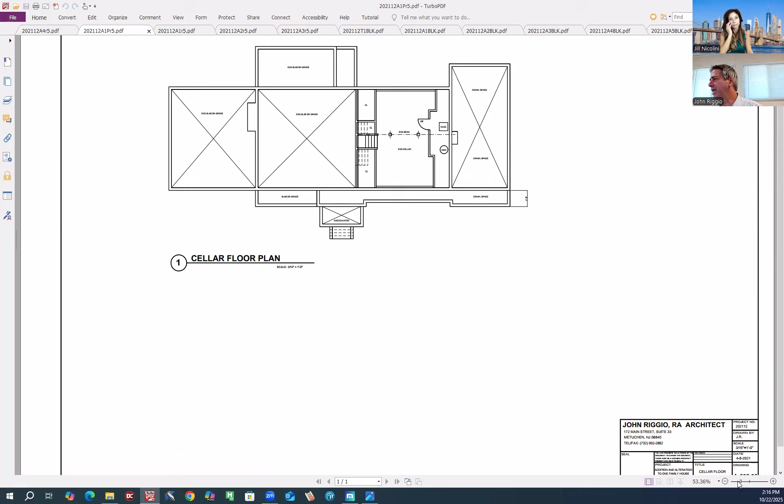This was design number five going through the process. I already sat down with the client multiple times and we adjusted the plan a number of times. A lot of times on these jobs, the house gets larger and larger instead of smaller - some people like the ideas I give them and want to expand further into a larger job.

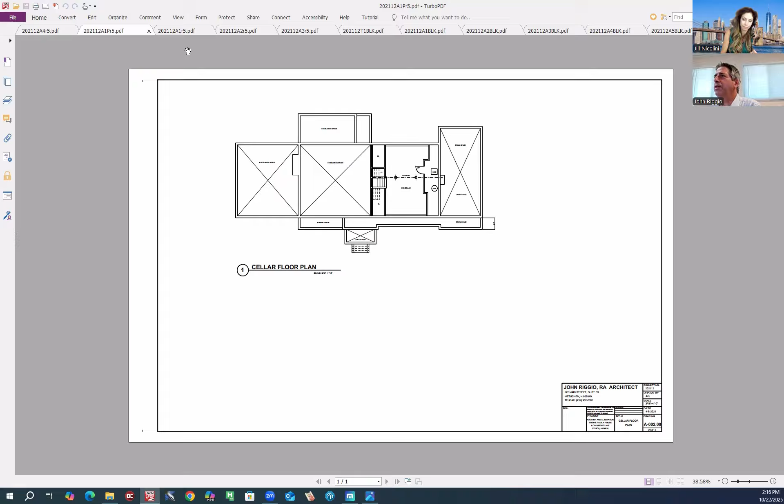So this is just the preliminary design. At this point the whole house is shaded in because we're completely removing everything and renovating the whole house. This shows the property in scale, including the existing driveway.

Of this particular project, the only thing that didn't change was the driveway. On many projects I put in a circular driveway, but for this one, given how the house is situated, they kept that driveway. They liked the side entrance to the garage, and that's really the only piece that stayed the same without getting changed much.

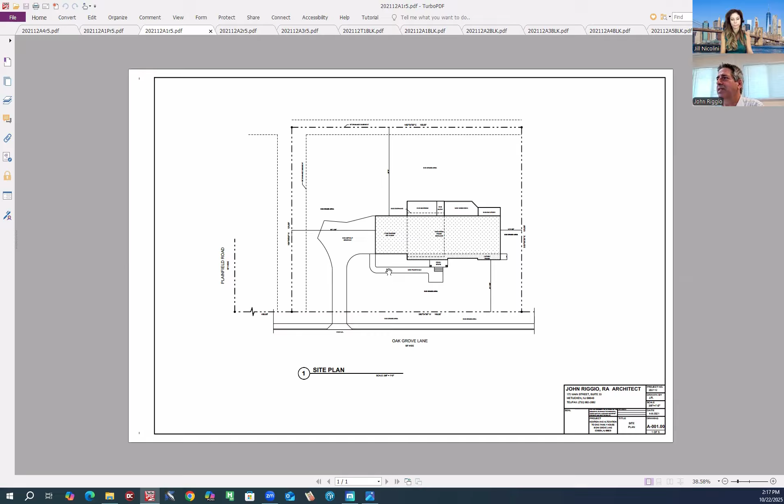Then here is the next design drawing, showing the first floor. Let me just zoom into this first floor.

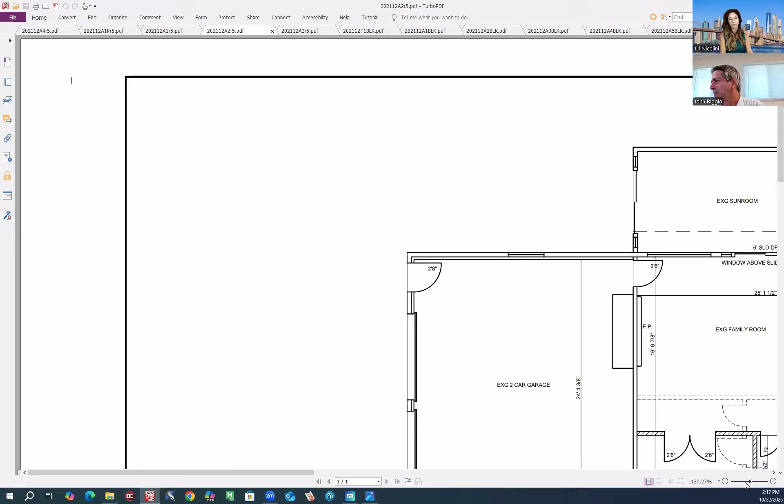Okay, so what's happening here is the garage is pretty much staying the same. They had an existing sunroom, and they didn't really want to get rid of it. Everything else is new. These dotted lines are all removing. The front of the whole wall of the house is completely removed, all the interior partitions are removed, and the old stair is gone.

So here we made this whole new entrance also. So now this has steps. Before you were just walking in on the grade level. Now you're going up five steps, which is sort of like a standard for most houses. Most people like five steps, and then you have a 4-inch step going into the house.

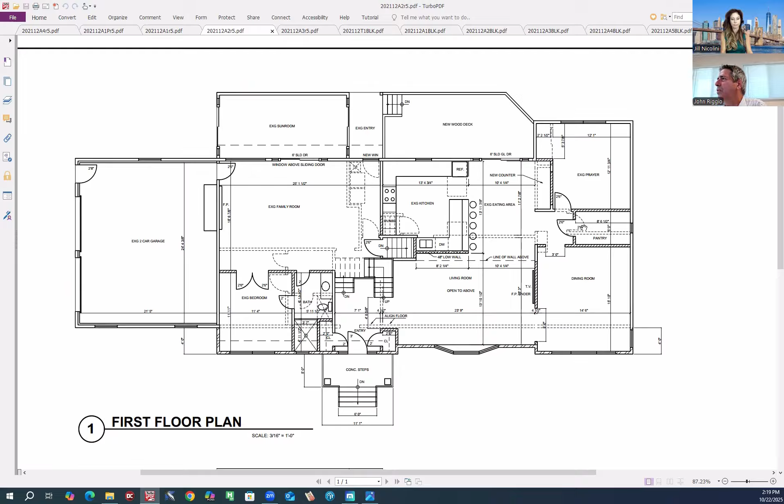Then you come to this entrance landing, and now the whole floor is aligned. Where you then walk over, you have this big double height space from the entrance all the way across. At the end, you have this wall where you put in a fireplace with the television, and then here you have this nice island with the kitchen. This whole kitchen is brand new. And here to have the formal dining and some rooms here, prayer room, a pantry room.

And then let's go up to the next floor. It's the second floor, and this whole second floor is brand new. The floor that was there is gone. And you enter in this whole space in here, this double height space is completely open. It has the same type of railings. I made these nice openings with railings, so you walk past them and you look into the double height space. And here you go to this nice L-shaped stair.

Then we have this nice open study room. It has a railing with a study room, and you can look all the way across to the double height spaces. This one is going across all the way 42 feet, all the way across from this open study room wall all the way across to the master bedroom wall. It's very large. Then this here has a hallway.

It goes into where you have one bedroom, two bedrooms, and they both share a bathroom in the hallway. Then you have the closed laundry room on the second floor. This is a standard for most houses. Most people don't like bringing the clothes down to the cellar anymore. This would add a space. They could have the laundry room on the second floor.

Then here we have a bedroom where it has its own bath. This next bedroom also has its own bathroom with the walk-in closet. And then, of course, you have the double doors leading into the master bedroom with the dressing room on this one, two small closets, and then also has a big walk-in closet too. And then the bathroom has a large whirlpool tub, has a nice standing shower, of course, two lavatories and the toilet.

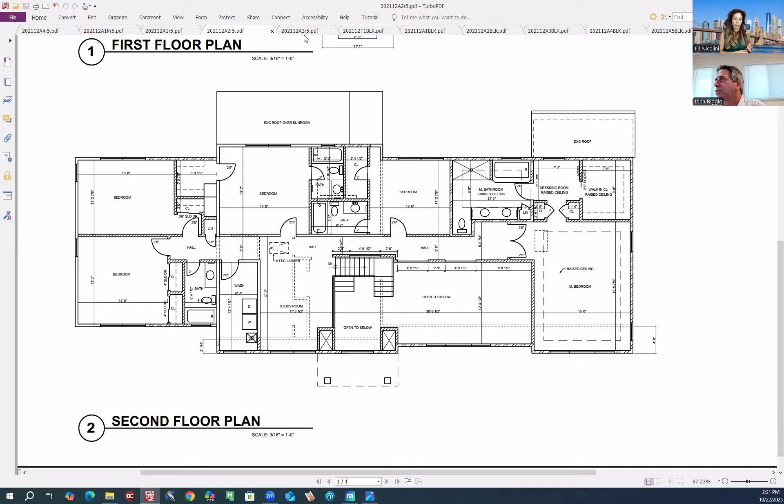So then let me go to the next drawing on this. So this particular job, what I was doing is selling them on this double height space. They couldn't visualize it that well. So this shows the whole new roof, and this shows the double height space with the arched openings and the railings in there, and then the L-shaped stair going to the second floor.

So they really liked this idea. I showed them this idea, showing this section, and it was okay. I think the only thing about this project, which was different than some of the others, is them wanting to keep the old fireplace that was there next to the garage. So that involved extending the roof chimney all the way past the roof. So let me get to the next one.

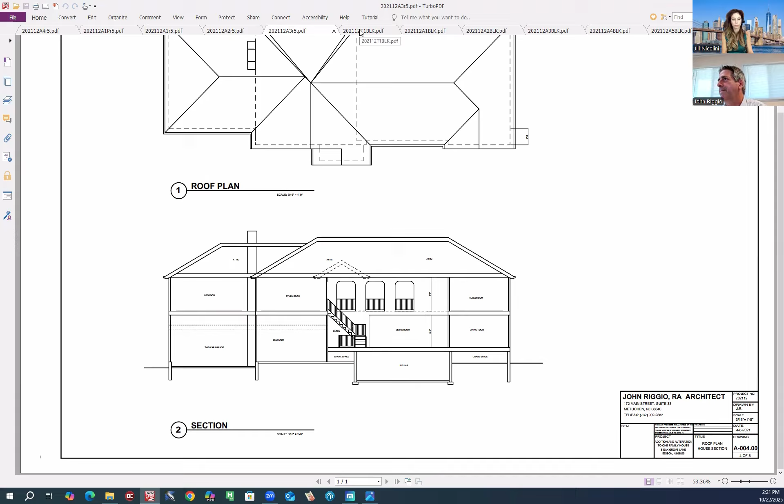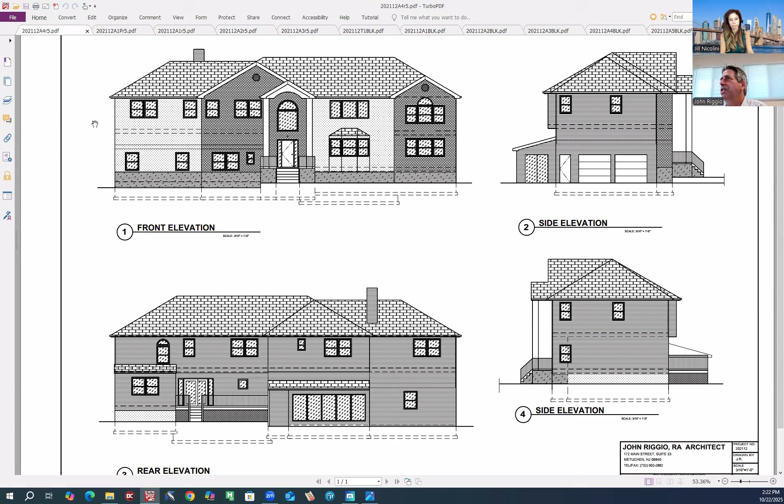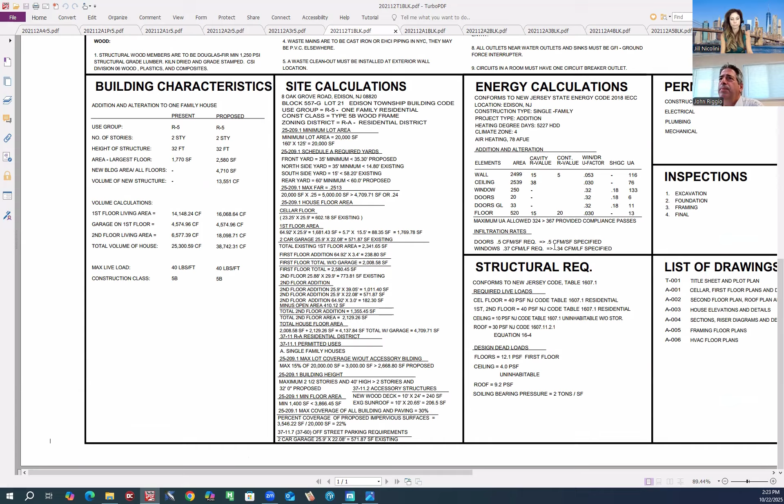Then from there, we finalized the design. We might have made some more fine changes before it was finished, and then went over to the set of construction drawings. So this house came out to 4,700 square feet. It's a nice large size house. And in this zone, they can build the house up to 40 feet, which is pretty large. Then this just shows the building characteristics, all kinds of basic calculations of volume and things like this.

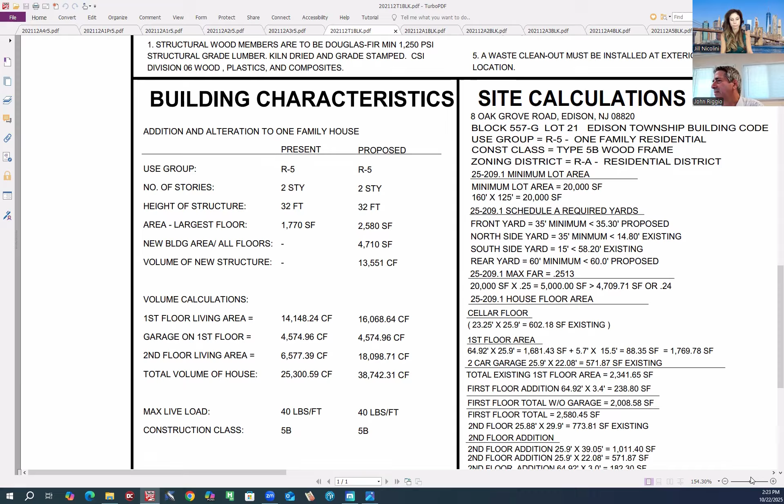So let me just zoom out of here.

Okay, so now this here is the plot plan. It just describes all the work that's involved, and this is standard of any project that I work on.

Then the next sheet from there goes to the construction drawings. This is just showing the new foundations, showing all the different construction of the walls, details, window schedules, things like that.

Depending on the job, some jobs I would provide a window schedule. A lot of times the window schedule has to do with the manufacturer of the windows. Some people aren't pretty sure what they want to get. A lot of times on these projects I usually use Andersen 400 series as a standard to go by. That's usually how those drawings are put together.

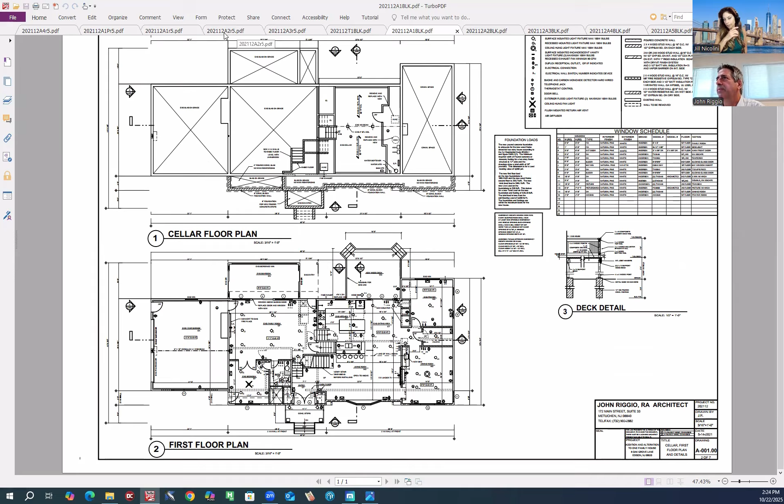Then the next drawing - now this is all done, by the way, just on an app, a computer system. This is not you with your pencil anymore, right? Or do you still have to do those type of drafts? Just curious - this is all done on the computer in a program somehow?

Yes, I use CAD software. I draw using my keyboard and mouse, and the software works really good. Certainly this is much faster than the old days of manual drawing.

It turns out as I was going through school, and as I graduated and got into the work world, everyone was changing from manual drawing to CAD. I really excelled at CAD drawing, and was able to help some offices really change over to CAD.

I was really the first one to start using my plotter machine. I was printing out blueprints, line drawings in blue lines. When I brought them to the building department, they were really impressed with them. At first they weren't sure if those were blueprints or printed. When I explained these were computer drawings that I printed out, they were amazingly impressed - they couldn't believe it.

So this here is the second floor, and it shows all kinds of things that we added from the design. We added a terrace in the back of the house with sliding doors from the dressing room, and added a balcony on the left side in this bedroom, and some other small changes, but from the design, almost all of the changes are there.

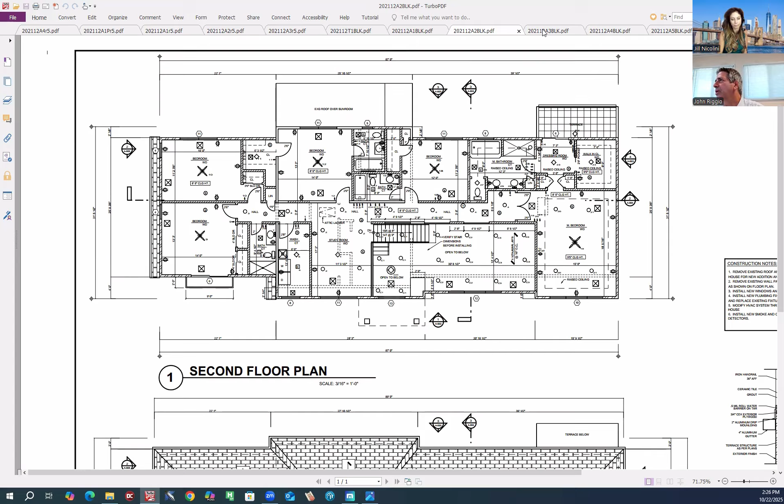So this here is the elevations, and it has the elevations and some details for the elevations, just pointing out some things like particularly a shear wall over the garage. If you're building over your garage, you have to install or construct a shear wall, and this has to do with metal anchoring and additional wood bracing.

Because anytime you build over your garage, the garage isn't insulated. A lot of times it isn't finished. They might have even built it with lighter construction. So all those things are necessary in the garage to build over the existing areas.

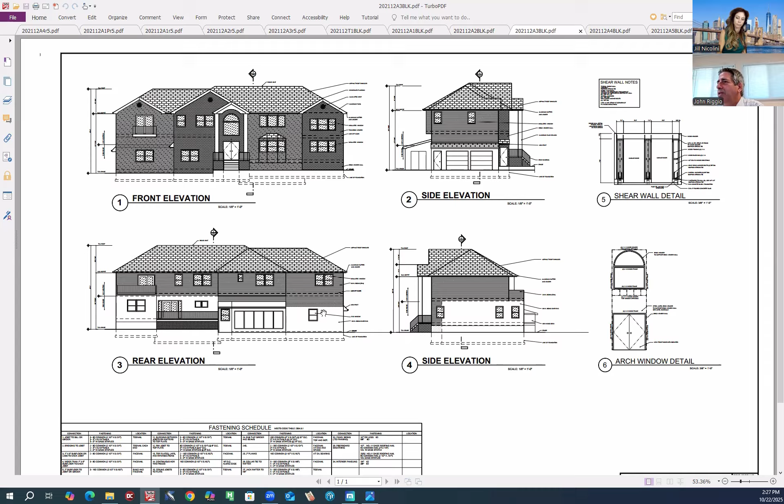Then the next one is the sections, and I added a water diagram since they completely gutted out the whole house - there's new water piping, the usual gas and water piping. A lot of times I would recommend electrical, but a lot of people like to stick to a lot of gas fixtures. They like to keep a variety of different fuels.

They like to keep the natural gas. Some people have also been installing something called a generac electric generator. It works on natural gas. You take the natural gas line, you connect it to this generac gas generator, and it's on the outside of your house.

So if your electricity shuts off, or you don't want to spend too much on electricity, this generator turns on and it generates electricity, and the electricity goes into your house through the same electrical panel you would use from the direct utility, and it powers the whole house. So in case there's a blackout, the generac unit turns on using natural gas and has the whole house working on electricity. It was really a trend.

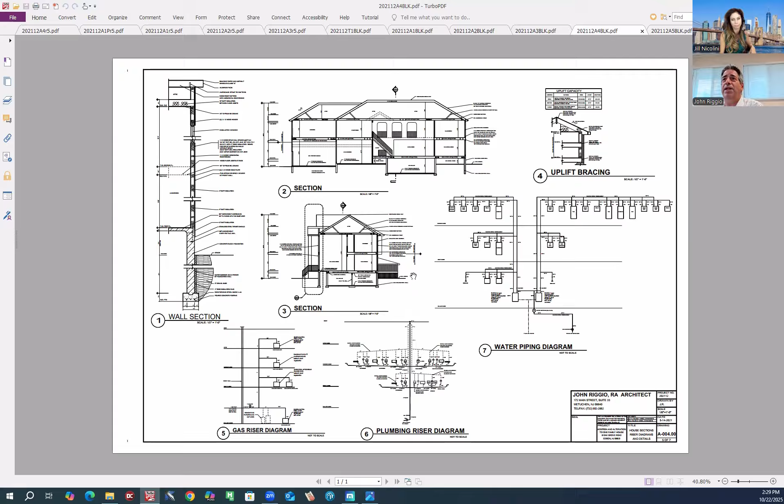Sometimes they change their mind, and a lot of it has to do with the initial cost. They could always put that unit in later. It depends on what their budget is, and as the project goes on there's all kinds of interesting budget issues. Sometimes people add on to the project, spending an extra $50,000 or more on things like iron doors, or adding more money into the kitchen with really nice fixtures and stone tops.

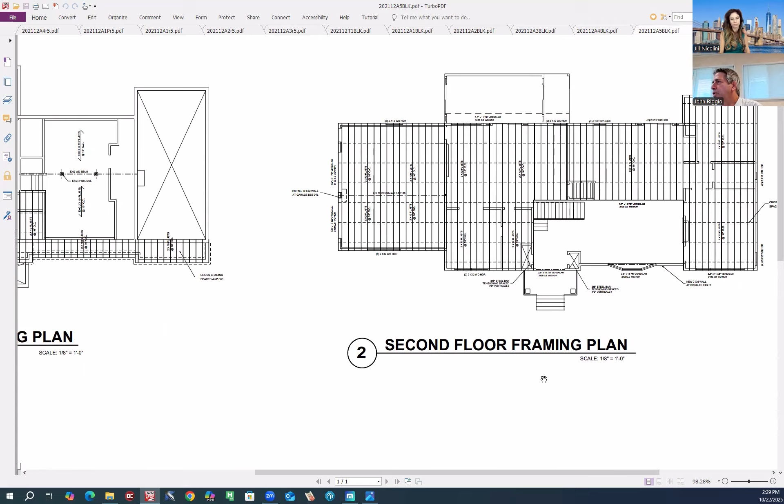So the next drawing here is just a standard wood framing drawing, showing all the different construction details for the house, so the contractor knows how the framing is supposed to go based on the drawing.

Then the next one is a mechanical drawing. This isn't new, it's just a requirement depending on the house and the type of construction, especially if there are questions about the heating and cooling system. This type of drawing also helps the contractor with installing the system, giving him an idea of where the heating units are going to go and how each one connects to heat and cool the whole house. That's pretty much where that is.

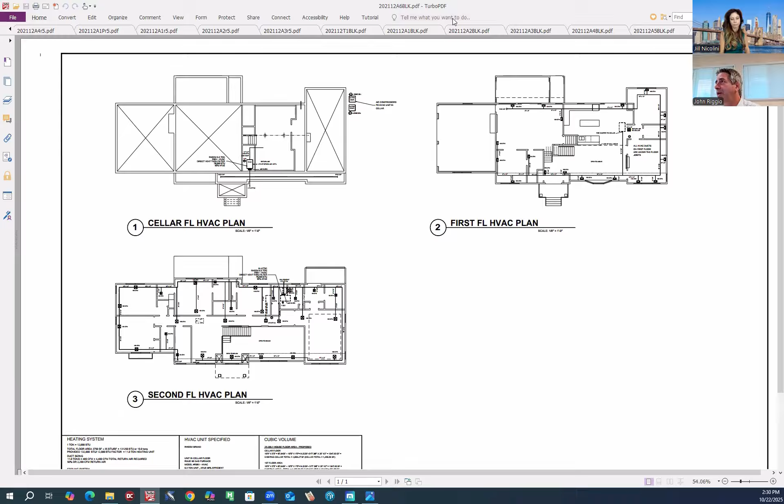So let me go over and share some photographs of this house.

This house is 87 feet wide — very long. The width at its widest point is about 44 feet, going between 35 and 44 feet with little ins and outs.